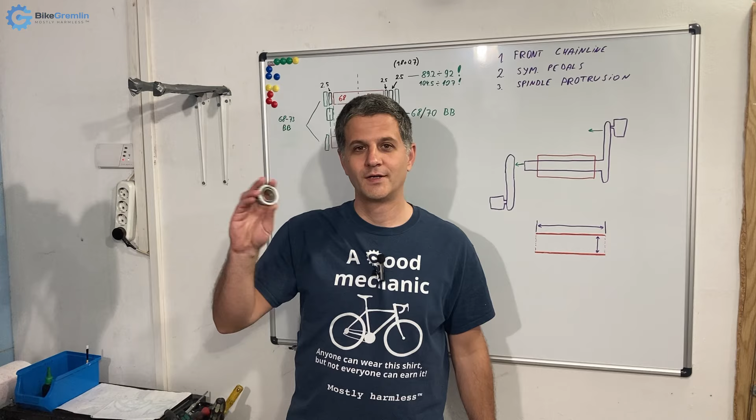Hi and welcome. Today I will be answering a question that many people ask and that confuses many people: when you're mounting these two-piece cranks where the spindle is part of the right hand side crank, and you just have the left hand side crank to attach to later.

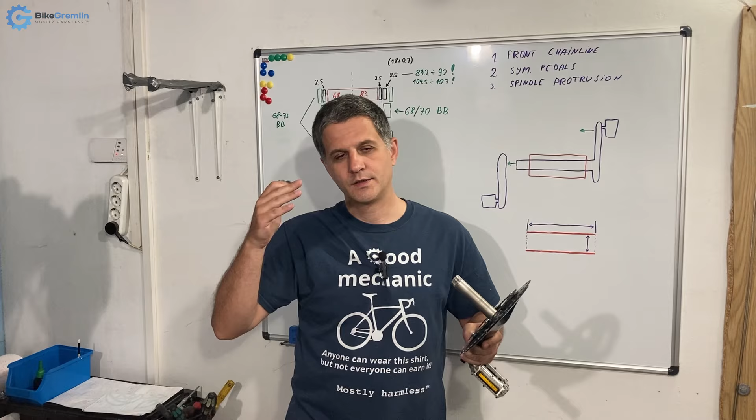For those systems, bearings and bottom bracket bearings and their cups usually have some spacers. So do you need to mount spacers? How many spacers? Do you need them on both sides, and why? That's what I will be answering today.

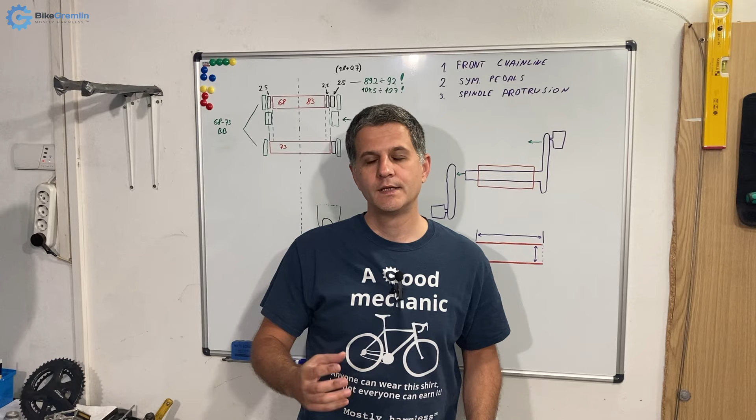Now some notes. I have three important notes to say here first. The first one is that I will mostly be dealing with Shimano threaded Hollowtech II bottom brackets and cups, but I will explain all the hows and whys so that you can apply that information to other models from different manufacturers, and for press fit and so on.

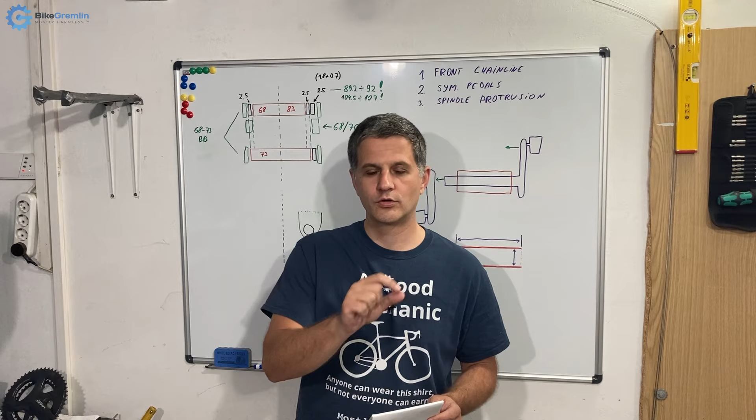The second thing is that when you Google your bottom bracket bearing model or crank model, you usually can find manufacturer specifications and instructions on whether you need spacers, how many, and on which side. So Google your model, add a space, and say user manual or dealer's manual or something like that. You can usually find that, and when you do it by the book, if everything on your bike is standard and more or less okay, you should be good.

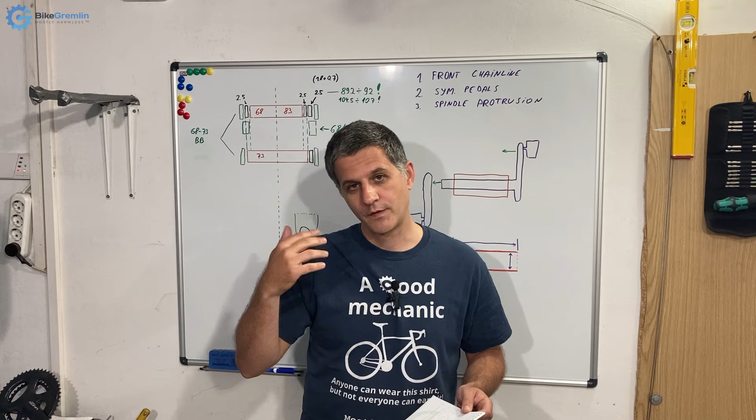That leads me to the third and final note, and that is that sometimes you deliberately want to make some improvisations, or you must because of how your bike is configured. So in this video I will try to explain all the hows and whys so that you can know what the problems are with improvisation and what to pay attention to. Okay, with that out of the way, let us move on.

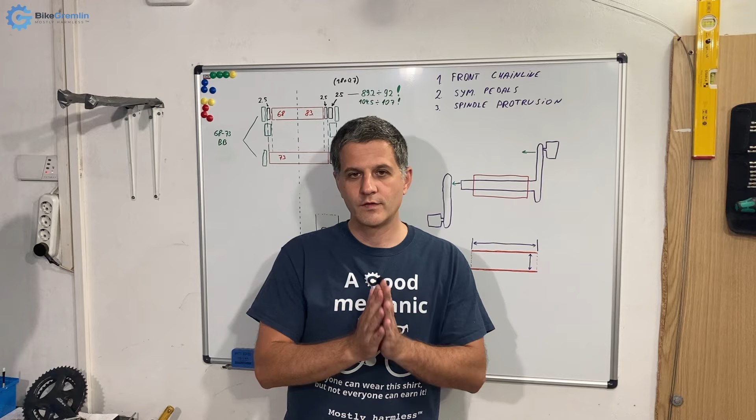The second big point is why we are doing that. When I'm doing something, I like to know why I'm doing it and to understand it. So we have three goals when we are dealing with those spacers and mounting our cranks. Our goals, I wrote them down here.

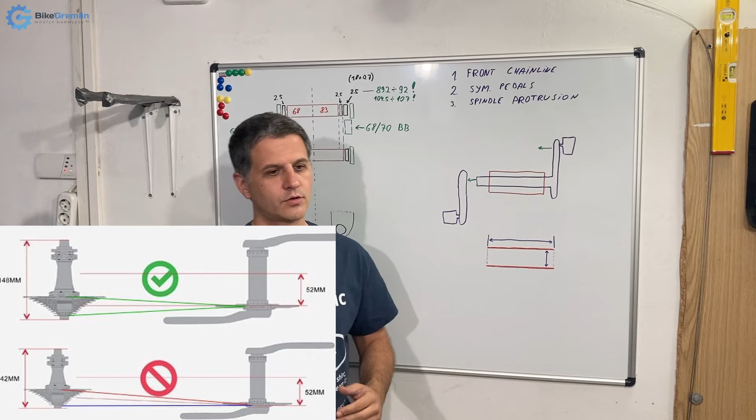The first one is the chain line, front chain line in particular. In this case, we want our front chainring or chainrings to be in line with the cassette. We don't want them to be far off, far out, or too close inwards, because then our chain will be running at an angle, and that causes poor shifting, your chain dropping when you back pedal, and more wear on components and many other problems.

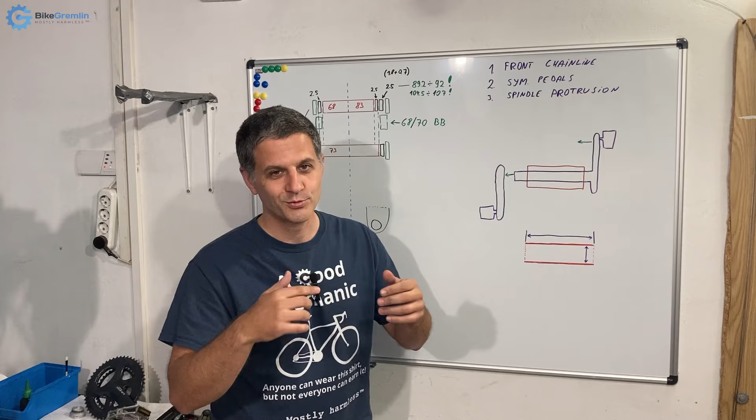For chainline, I have a separate video where I've explained that, and an article, and I will list those in this video's description. If I forget, use the comment section to remind me. So that's our first goal.

All three goals are what we are trying to achieve ideally at the same time when mounting our cranks and dealing with spacers. The second goal is to have our pedals symmetrical, meaning the right hand pedal and left hand pedal are approximately at the same distance from the frame's centerline, so that your legs are riding normally, not favoring one side or the other.

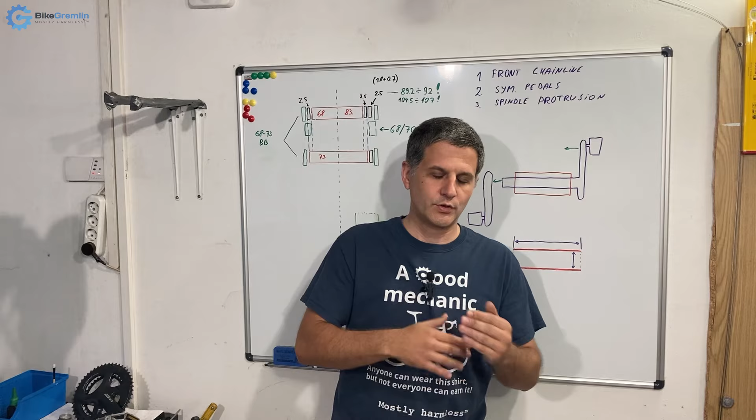So we don't want any drastic asymmetry when it comes to pedals. And third and final, we have to worry about the spindle protrusion.

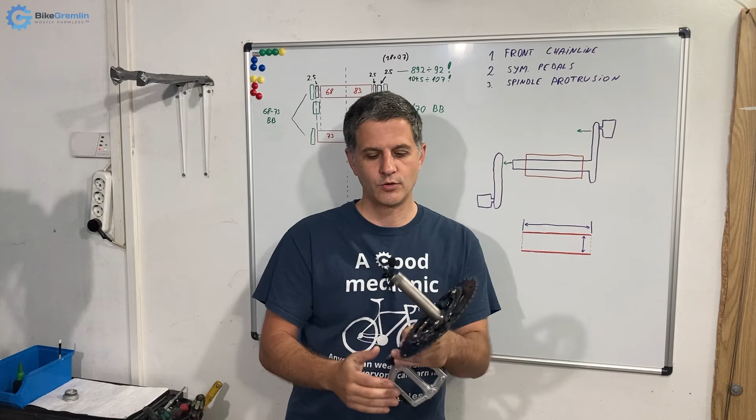What I mean by that: this is what a standard two-piece crank looks like, and we have a certain length of the spindle. So when we install this into our frame, if we have too many spacers on the right hand side, so it's too far out, then it will not stick out enough for us to mount the left hand side crank. It would look like this.

So anyway, that's one concern. Also, we don't want it to be too far out. This is what I tried to draw here.

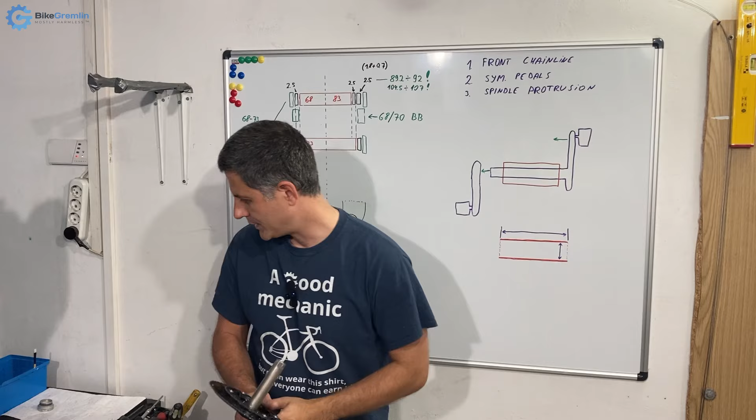If we move the right hand crank and spindle to the left, the other end moves to the left as well, as does the left spindle. That's because when you look at this system, we do have some wiggle room for the left hand spindle crank to move in or out, so we have some playroom, but it is not unlimited.

Here I can only push it this far. After that it will no longer go in. If we make this protrude too much out of the frame, then we would have some distance, some free play in our cranks when we mount them in the frame, and so they will be able to move and change your chain line as you're riding.

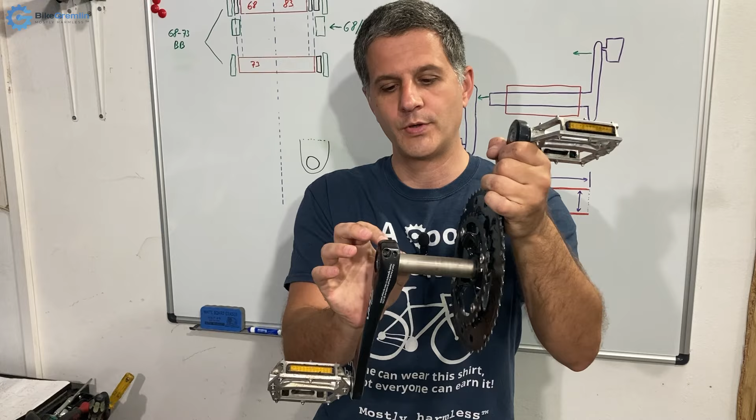It will not be held in securely, and also the bearing preload is adjusted by pushing the crank, at least with this model. With some it's on the other side, but you always have a certain amount of bottom bracket bearing preload that you can adjust, but it is not unlimited. So if the spindle is too long, if we don't put enough spacers all together, then we will have a problem adjusting enough preload on our bearings, and that will make them run inefficiently and create more drag and more wear.

So those are the three goals that we wish to achieve. Now a small digression, but a planned one. When it comes to choosing your bottom bracket bearings, I will briefly discuss how that is done. For those who just want to skip to the parts where I talk about spacers, you can use the table of contents or skip on the timeline. So if you're still here, let's discuss what I mean.

If you need to buy new bottom bracket bearings, it's a good idea to measure and double check. Sometimes owners and mechanics don't put the right parts in, so assuming everything is correct is sometimes wrong. It's not a bad idea to double check. When you need to see what kind of bearings your bicycle takes and how many spacers you need, there are two dimensions you need to measure.

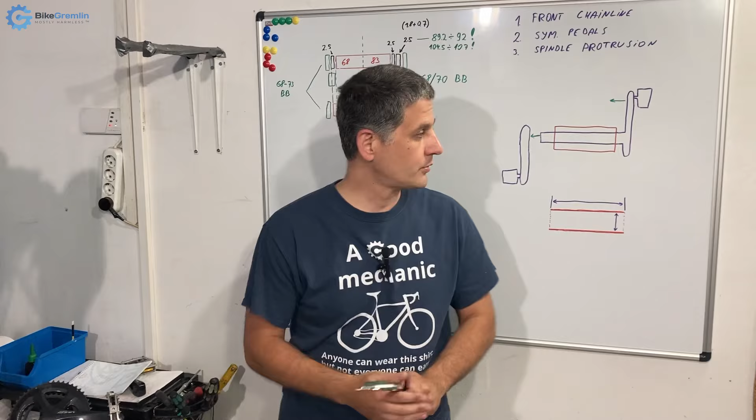The first one is the bottom bracket shell's width, which you can measure with calipers or a ruler. We will now move the camera to the bicycle to show how to measure that, but before that, just to note that we also need the shell for the bottom bracket on the frame, its inner diameter. So those are the two important dimensions: shell's width and inner diameter. Now we will move to the bicycle to show a few ways of how you can measure them.

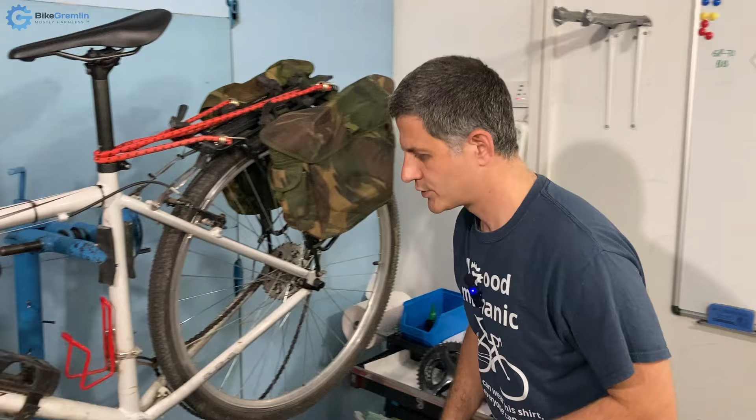So the way to measure the bottom bracket shell's width is to use, for me it's simplest, calipers, and just measure from one face to the other face. Here I have the right hand side cup already installed, so it's not as easy to align them, but that's for demonstrational purposes. I need to show something without taking too much time on the video, but this is the basic principle. You can also use a ruler to measure that.

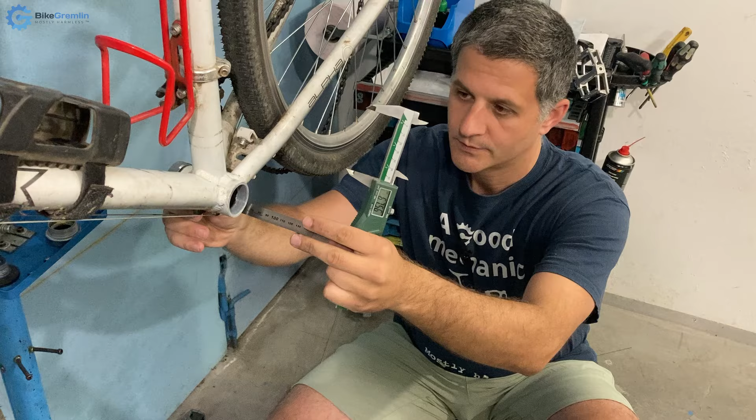It's more accurate when using calipers, but you can get it right pretty well with a ruler too. Here my frame has some cable guides on the bottom, which makes it more difficult to align the ruler properly. This is a 68mm wide bottom bracket, and using a ruler like this, it's not as easy to measure accurately. But that is how you measure the width.

As far as diameter goes, you can also use a ruler to try and get it in the center and measure the diameter, however that's not very precise for me. It's easier for me to use calipers. I also have a video explaining how to use calipers, so I'll try to put that in the video's description as well, but this is what I'm aiming for. Basically, this is the measurement I'm taking, and here I got 33.4 millimeters.

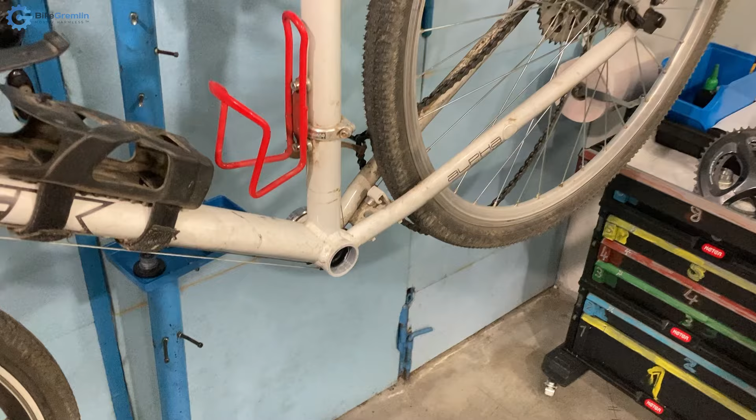Another problem when using this method is that you can move this a bit to one side or the other, and then you'll get a smaller diameter compared to getting it right at the middle. To avoid any imprecision or inaccuracy when measuring, I also have a video and article explaining the difference between accuracy and precision and how measurements are done. I'll try to put that one also in the video's description, so about 100 days worth of watching and reading.

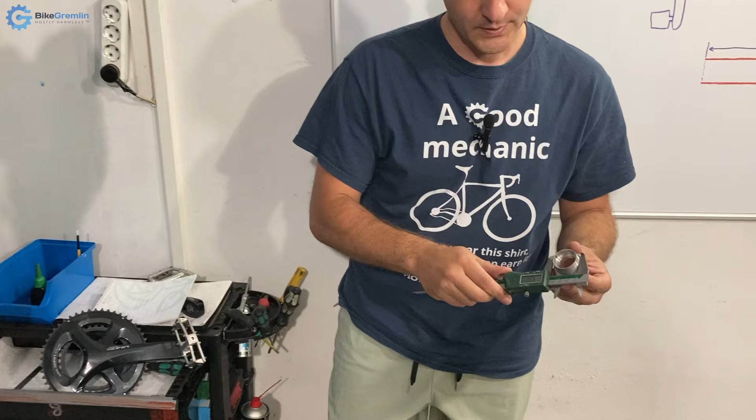But how to measure that more precisely: it's easier if you have some cups that are already nicely fitting in your frame, and it's more accurate to measure their outer diameter, especially with calipers, because then you know that you are aligned, these are parallel, so they are measuring what needs to be measured.

For press fit bottom brackets, this is all that it takes. However, for the threaded ones, there are a few catches, and I will briefly explain those.

As you can see, the threads are interlaced, so you have the cup that screws into the frame, and that is why the outer diameter of the cup is greater than the inner diameter of the shell when you measure it. Otherwise you would be able to just press it in. So when you measure the outer diameter, you get a greater distance compared to measuring the inner diameter of the bottom bracket shell.

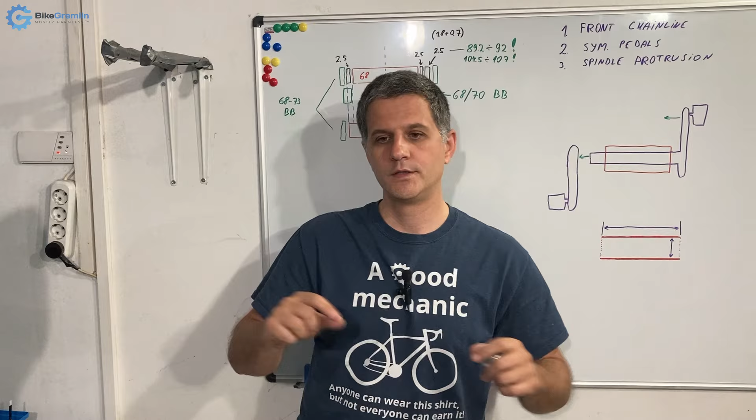On my website there is an article showing and listing all the diameters, both inner for the shell and outer for the cups, for all the threaded bottom bracket standards. I'll put that in the video description. I also have an article explaining and listing all the diameters for the press fit bottom brackets. That too will be available in the video description. I use that as a resource because there's no way for me to remember everything - there are so many different variations.

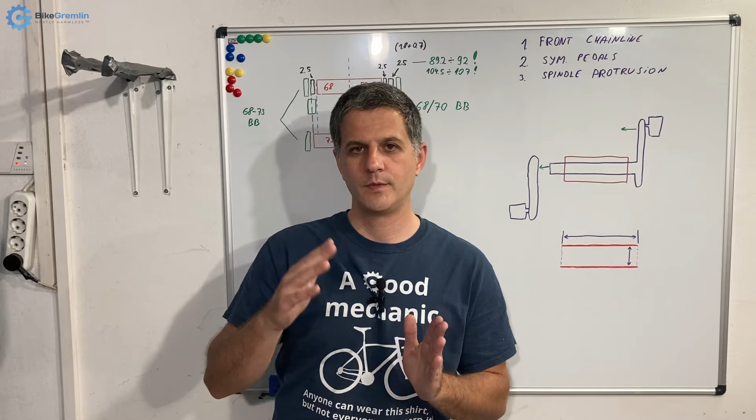But let me stay a bit longer on the threaded bottom brackets. Generally, most bicycles made in this century will have a bottom bracket threaded to the British standard, or English, however people call it. However, a newer, later standard is called T47, and with T47 you will get about 47 millimeters diameter. So if you have a huge diameter, it's most probably, as far as I know at the moment of recording, T47 - that's the only larger threaded standard.

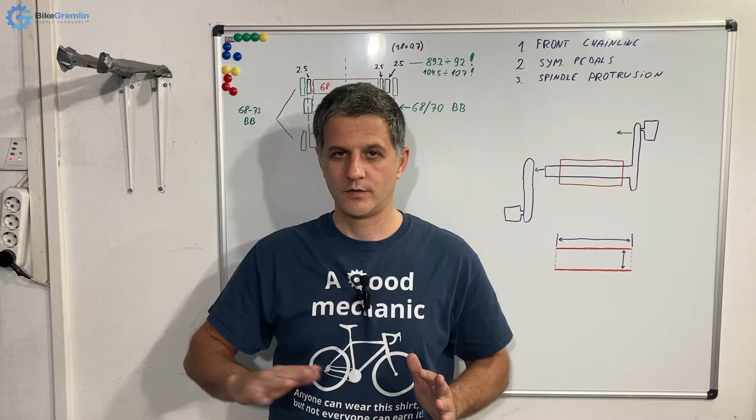However, for the smaller diameters, if you are at about 34-35 millimeters, then it gets a little trickier. There are several now decades-obsolete standards that you are highly unlikely to come across, but in addition to the British standard, there is another one more likely to be encountered on some Italian road bicycle frames, for example - the Italian standard. It's very similar in diameter to the British, and again British is the most common, so if it's not a huge hole, it's most probably British, but it could be Italian, so it's best to measure.

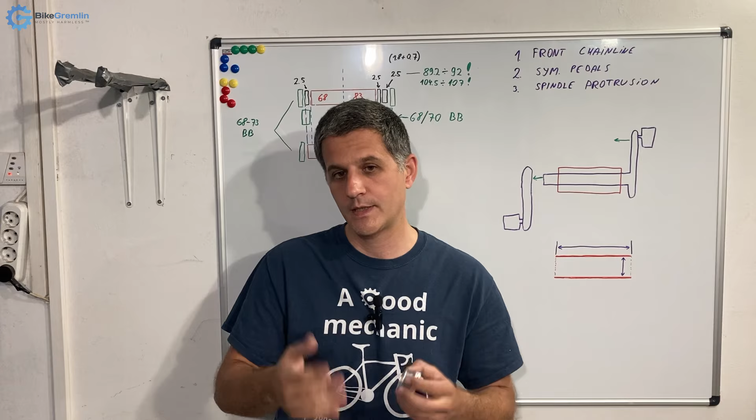How to measure it and how to tell the difference: unscrew and remove the left hand side cup if you have cups already installed. Don't touch the right hand side one, just the left hand cup, and measure its outer diameter. If you get a result below 35 millimeters, then it's British standard. If you get a result over 35 millimeters, then it's Italian. Here is an Italian cup and cone system of bottom bracket, but you can see the diameter is over 35 millimeters.

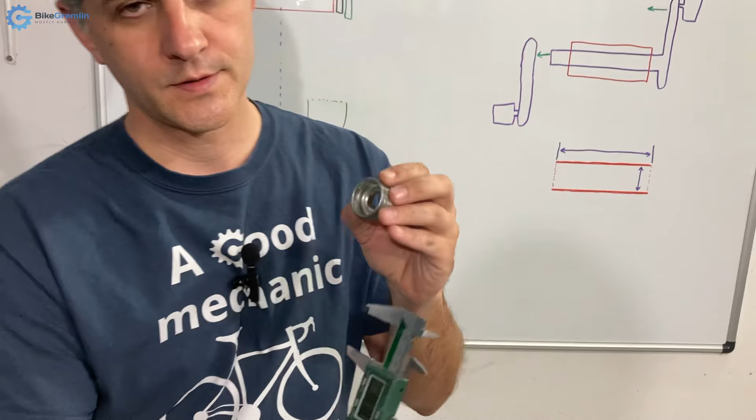If you're measuring the bottom bracket shell on the frame, if you don't have cups, then you can get smaller dimensions that are listed on my website, but roughly the British will be about 34 and the Italian will be about 35, but maybe not over them. So for those details, look at the website, but that's the basic difference. And why is that important?

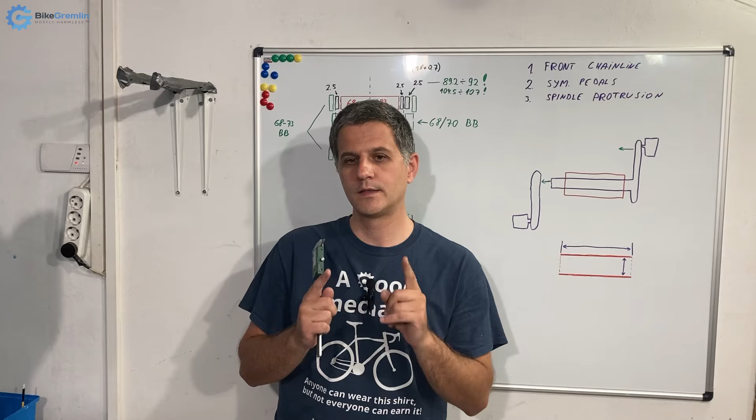Another way to tell if your frame is Italian is that the bottom bracket shell will be 70 millimeters wide. All the other standards, the British and the T47, don't use that width. So if it's 70 millimeters, that's another sign it might be Italian, but it's best to double check both the width and the diameter to avoid a measurement mistake causing problems.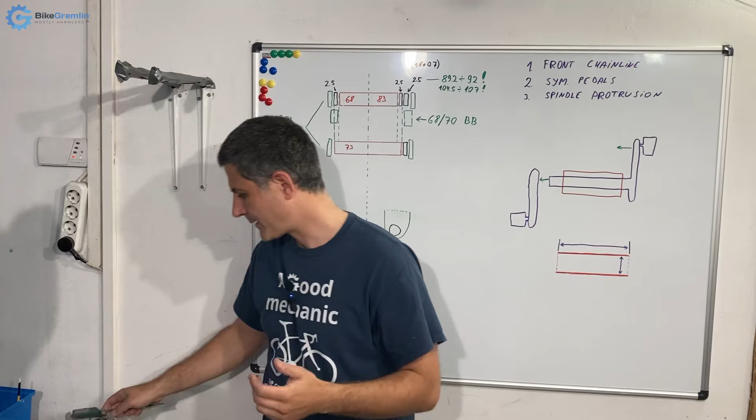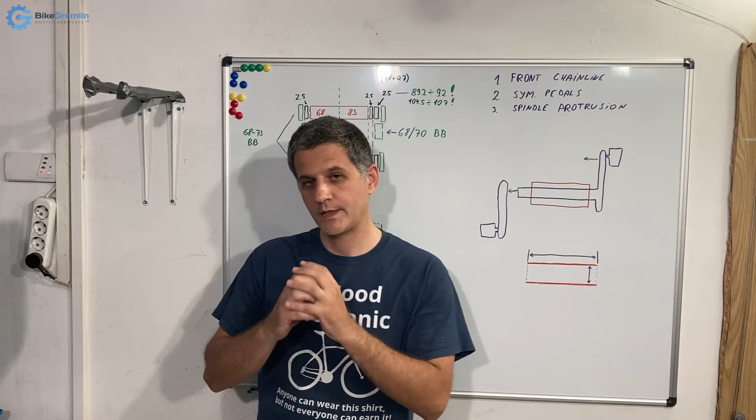How can it cause problems? Well, with the Italian bottom bracket standard, both cups are unscrewed counterclockwise, so it's a normal thread, which is a bad design, by the way. But for British and T47, the right hand side cup is unscrewed clockwise - you unscrew it in the direction you would normally screw a bottom bracket cup or screw in. So it's the opposite for the right hand side cup, and many people make the mistake of trying to unscrew the right hand side cup counterclockwise, as they would normally do with all other bolts and nuts, and then they end up tightening it or damaging threads and causing all sorts of headaches.

So that's why I took so much time to explain this. It's touched upon in many of my other videos and articles, but I think it's worth it, and you can always rewind. So now finally, if I didn't forget anything, we can now go to the spacers.

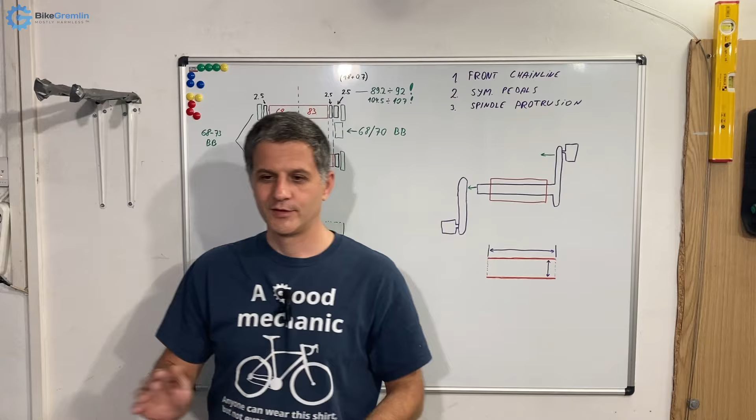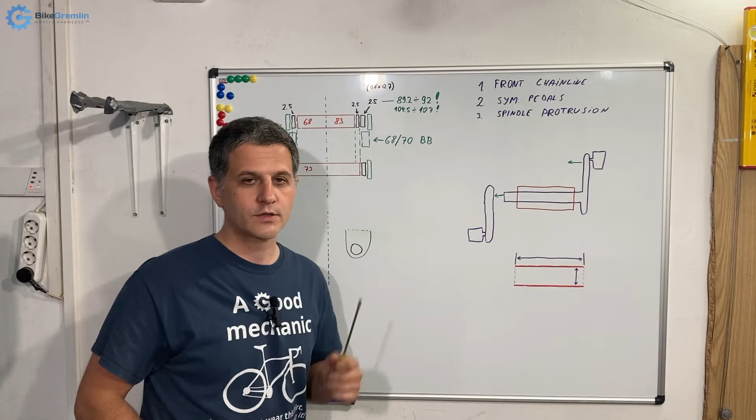Okay, so the action starts now. For spacers, many Shimano threaded bottom brackets require you to place one spacer of 2.5 millimeters thickness on the right hand side. So regardless of the other combinations, there's always one spacer on the right hand side of 2.5 millimeters thickness.

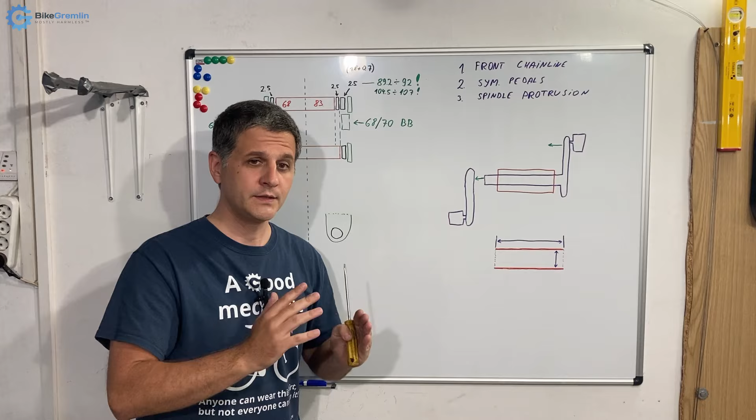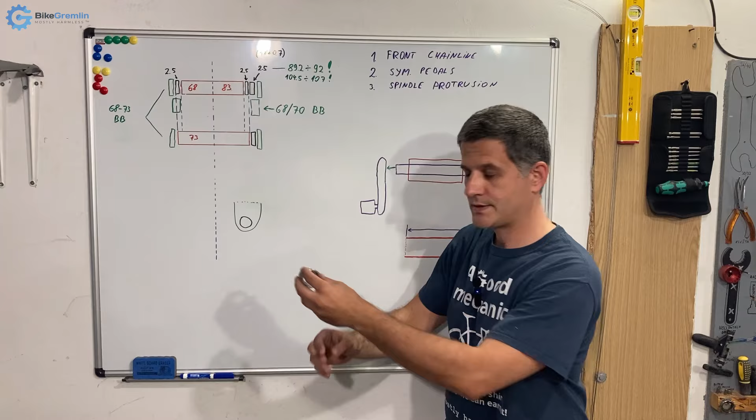Often when you buy bottom bracket cups, you will get them with a combination of two spacers, 1.8 and 0.7 millimeter thickness. Why did they do that? Well, that brings us to our goals for front chain line. They wanted to allow you to have the chain rings and pedal symmetry right, as it should be. But if you need to add a front derailleur that is held in place by the bottom bracket cup, as I try to draw here, you put the bottom bracket through it and tighten it, and that also holds your front derailleur mounting, or a chain guard or similar, in place.

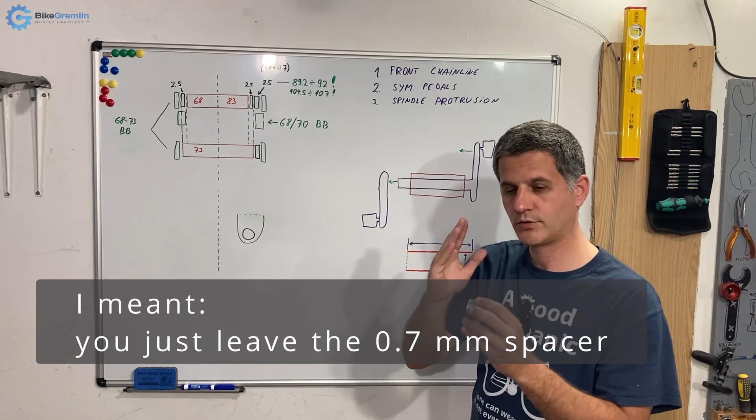Since they already designed 2.5 millimeters of extra room, you always have a spacer. If you're using one of these mounts, depending on how thick they are, you can remove all the 2.5 millimeters and just put that thingy, or remove one of these spacers. If it's 1.8 millimeters or so thick, you just leave the 0.7 millimeter spacer of the two thin ones you get, so you can get your chain line and pedals correct while still being able to mount chain guards and similar stuff. That is why they designed most, but not all, of their cups, and as far as I know all the threaded ones, with the 2.5 millimeter spacer. So that is a given.

Now let's talk about the other systems and the other widths and spacers. But first let me show you spacers, just one second.

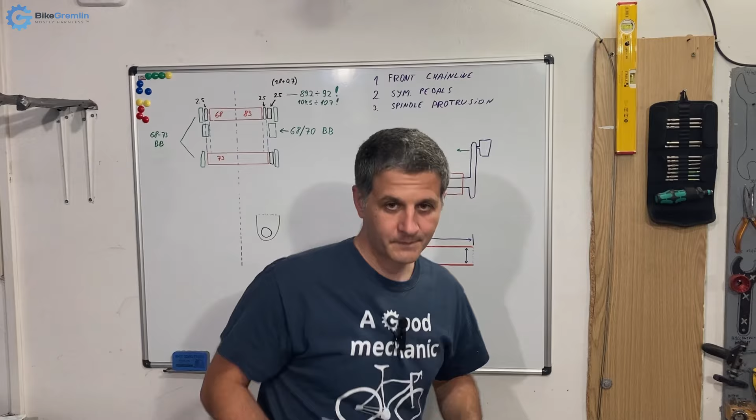Okay, sorry for the interruption, I forgot to have these at hand. So this is a 1.8 millimeter spacer next to a 2.5 millimeter spacer. I don't have a 0.7 millimeter spacer with me right now, but when I align the 0.7 with the 1.8, I get the same thickness as the 2.5 millimeter spacer. So those are the options you have.

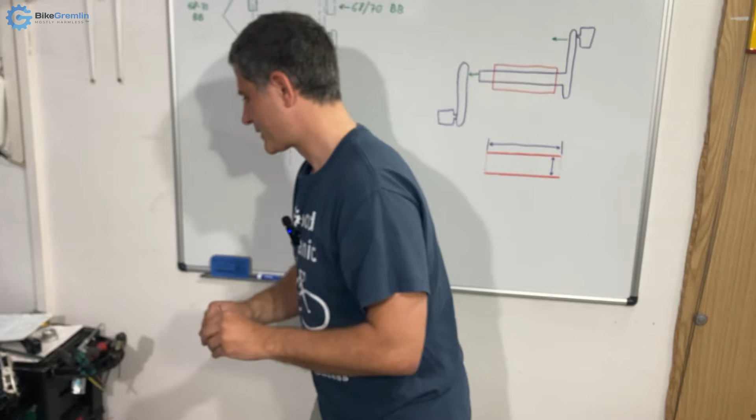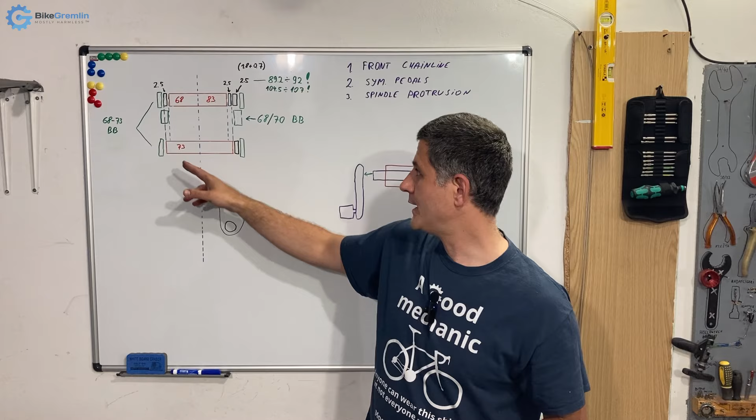Now let's move on. When it comes to bottom brackets, let's start with road bicycles. If you have a crank for a road bicycle, like a 105, Ultegra, Sora, or similar, they are designed for the 68 millimeter bottom bracket shell on the frame. They will not fit the wider ones very well, though there are models for the 83 millimeter wide shells, so when buying, double check depending on your frame. You should know what kind of bottom bracket shell your frame and cranks fit, and when buying new cranks, double check if they fit there.

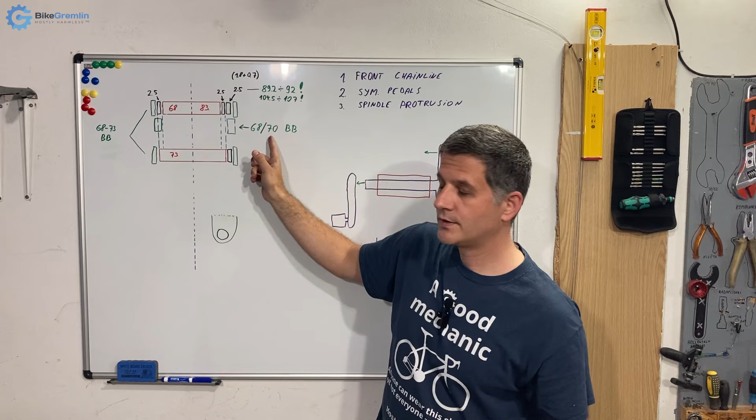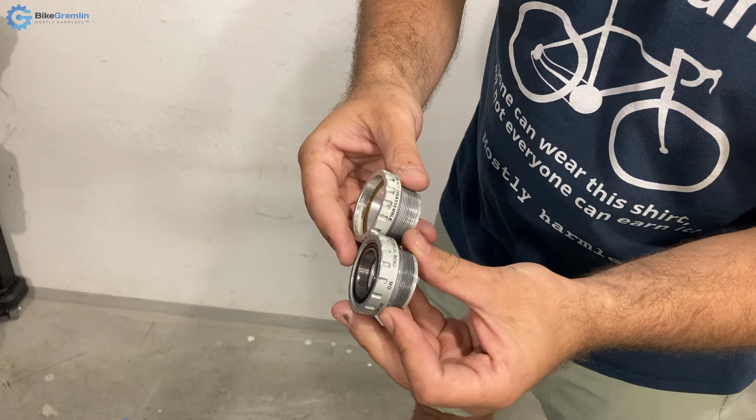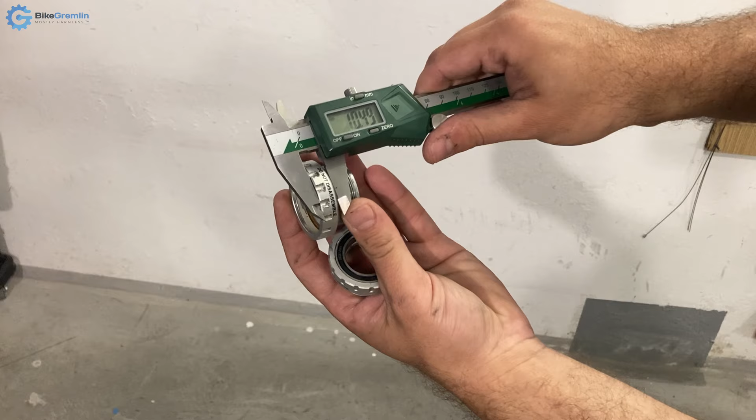What is the catch? Here I will try to show it. This is the right hand side cup for the mountain bike bottom bracket and for the road bike, and you can see the road bike bottom bracket is a bit thicker here. I will try to measure them for comparison. So here we have 11.4, 11.5, something like that, for the road bike, and for the MTB we have 10.49. So the road bicycle bottom bracket cups have this part a bit thicker, but not by 2.5 millimeters, just by 1 millimeter. So on both sides you get about 1 millimeter more compared to using the mountain bike cups.

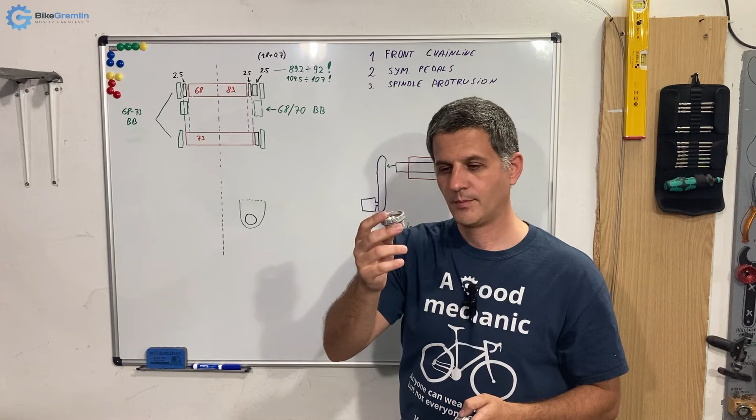So you don't need 2.5 millimeter spacers, install those two cups and you're good. If you decide to use mountain bike bottom bracket cups, you might end up with, if you use only one 2.5 millimeter spacer... I'll get to that, sorry, just a second.

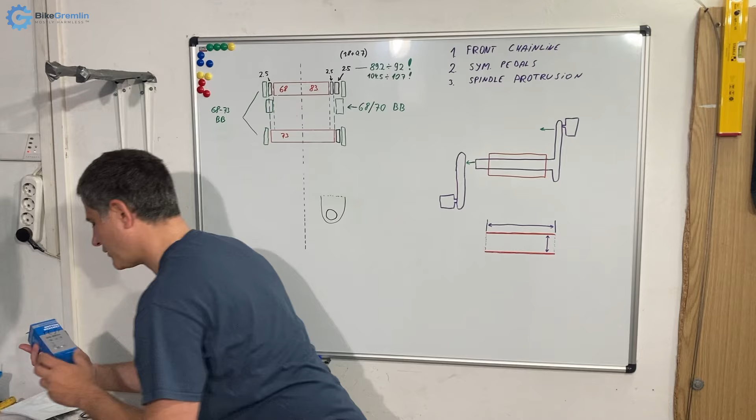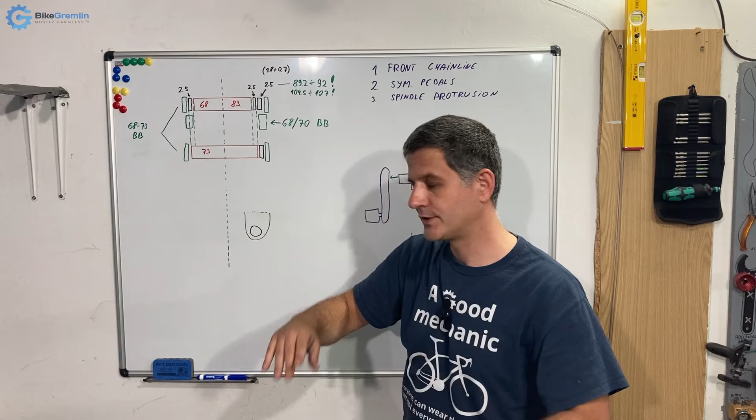Now let's talk about mountain bicycle bottom bracket cups. As you can see, the right hand cup has longer threads, a bit more thread here, and that has a good reason. Shimano usually sells their mountain bike bottom bracket cups to fit both 68 and 73 millimeter wide shells, and also makes them for 83 millimeter wide as a different model. How do they achieve that? Well, you saw they made longer threads, so their design is you always go with the 2.5 millimeter default spacer, as I explained earlier. But if your frame is 68 millimeters wide, you also need to add an extra 2.5 millimeter spacer on the right and 2.5 millimeter on the left, so you get effectively 5 millimeters more.

On the other hand, if your frame is 73 millimeters wide, then you don't use the two extra spacers, just the default one for the right hand side. Because the frame is wider by 5 millimeters, 73 compared to 68, you remove those two spacers, and then you have the bottom bracket cups at the same distance from each other compared to fitting them on a 68 millimeter frame with two extra spacers. That is the idea for the chain line and pedal symmetry.

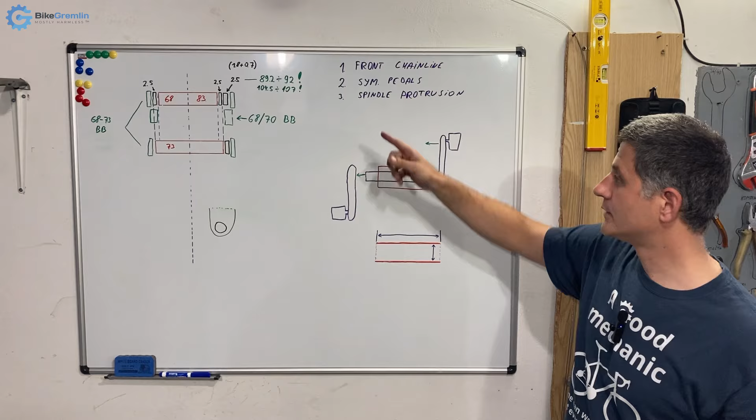This leads us to one catch: if you have a road bicycle crank and you're trying to use bottom brackets for mountain bikes, they are designed to be a little bit wider because mountain bikes use a wider chain line, so they want the front line to align with the wider rear chain line.

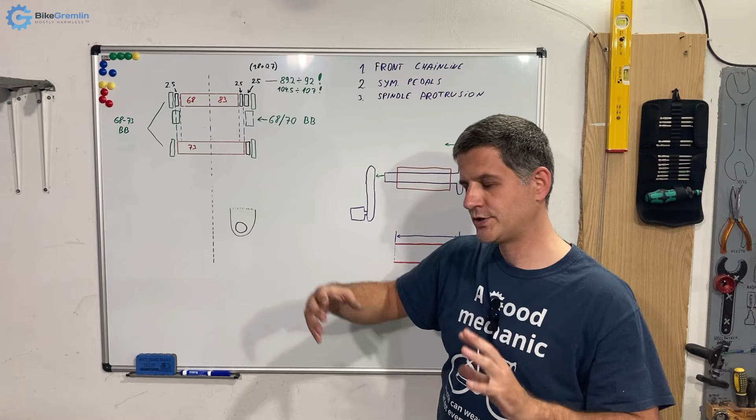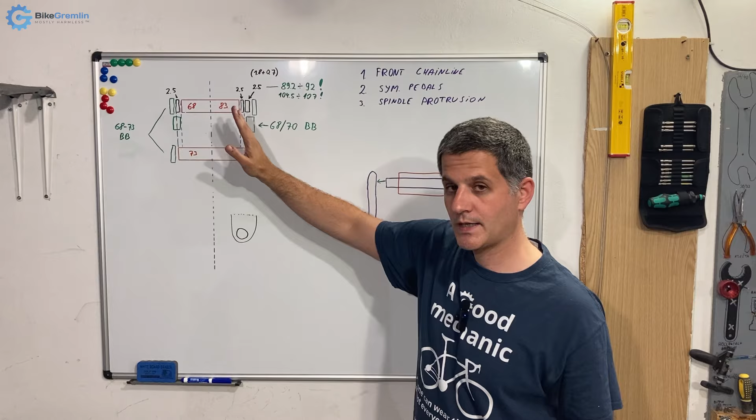In that case you might end up with your axle not protruding enough to mount the pedal, which could be a problem. You can play with that by making custom spacers so you don't have 5 millimeters more on a 68 millimeter bottom bracket, but make it a bit smaller. You need about half a millimeter or 1 millimeter of spacers on each side, not 2.5, to get the bottom bracket cup ends at the same distance. That's another thing to pay attention to, to make sure you did everything right.

Shimano have this little thingy that is mounted on the left hand side crank. You mount it from the inner side and use a bolt to put it through, so it's held in place. Then when you slide your crank onto the spindle, you should be able to press this to get in place and get aligned all the way. It has a small protrusion that should fit in.

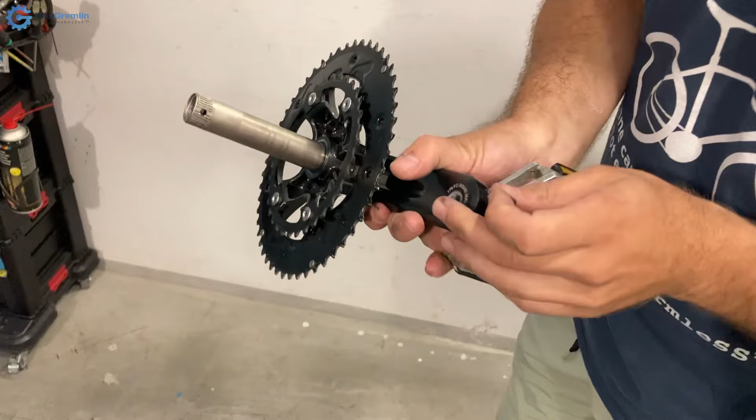Let me show you. This is where it goes in, this is the hole, so when you mount your left hand crank and tilt it, it should come in here. In case it cannot engage, it's either too far out or too close in, meaning your spindle length is not appropriate, or that you did not put enough spacers. If you put too many spacers, you will get it too far out, which tells you that your left hand side crank will not have enough real estate to be held on tightly.

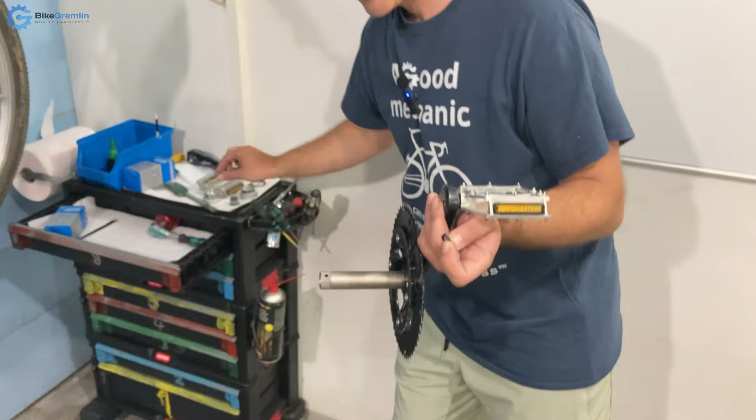So this is more like helping you make sure everything is aligned, it doesn't hold any strength. Likewise, if it cannot engage on this side, if it hits here, that means your left crank is too far in, and it usually won't go that far because this widens. But if you manage, you'll know you've put it too far, and you'll have this protruding outside, unable to use the bolt at the end of the spindle to push the crank and create bearing preload. So in that case your spindle is protruding too far out.

That's what this is used for, and it's a neat system, about 5 millimeters wide. If I compare putting it to the middle, we have about 2.5 millimeters of room to miss on the outside or inside, so there's some adjustment left. But if this fits and you mount it, you can unscrew the bolt and throw it away. It's not needed to hold the cranks in place, it's just used to keep everything aligned and help you assure you did everything properly.

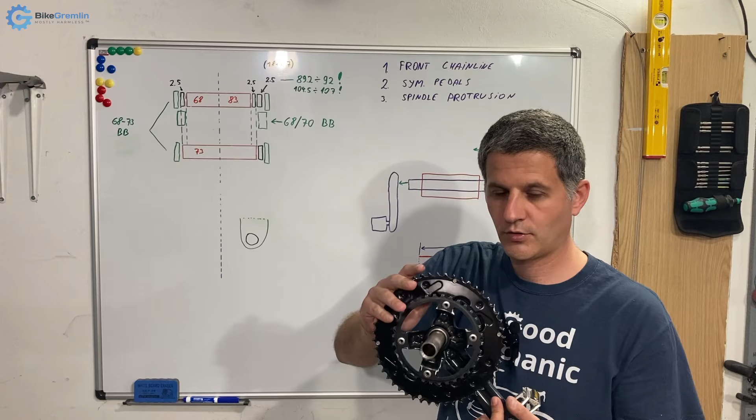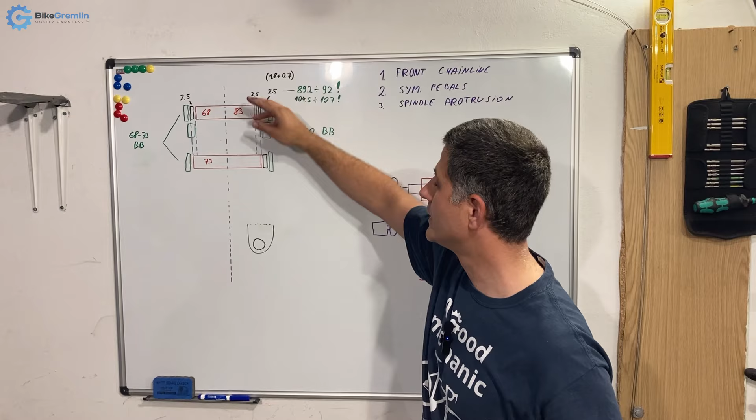So if you are playing with the chain line, as I tried to explain using bottom bracket cups for mountain bike cranks with a road bicycle crank like this one, you'll notice that your spacers, even by the book, will be too wide and you won't be able to engage that little thingy. So you'd have to figure it out, and usually it helps with a 1 millimeter spacer on each side. Or you could put 2.5 millimeters on both sides and remove just one, moving your cranks a bit to the left. It's not a huge deal, but depends on your rear chain line and what you're trying to achieve. We'll watch that video about chain line, so I won't go into those details here.

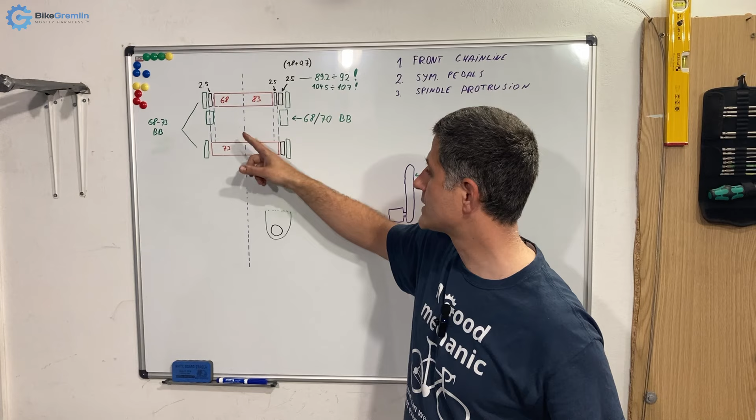And that's one thing. When dealing with 83 millimeter bottom brackets, for some reason Shimano designed those cups so they have to be used with the default right hand side spacer of 2.5 millimeters, plus an extra 2, just like when using 68 millimeter frame with mountain bike bottom bracket cups. So they left some more adjustment there for some reason. I don't have the answer to why, but it usually boils down to playing with the chain line, getting it right, and offering some room to wiggle.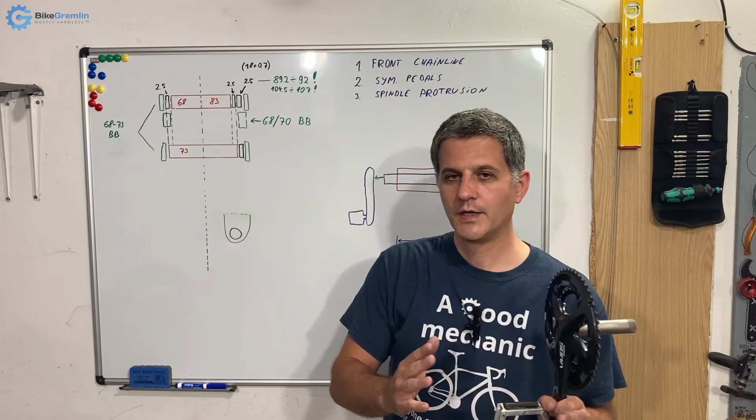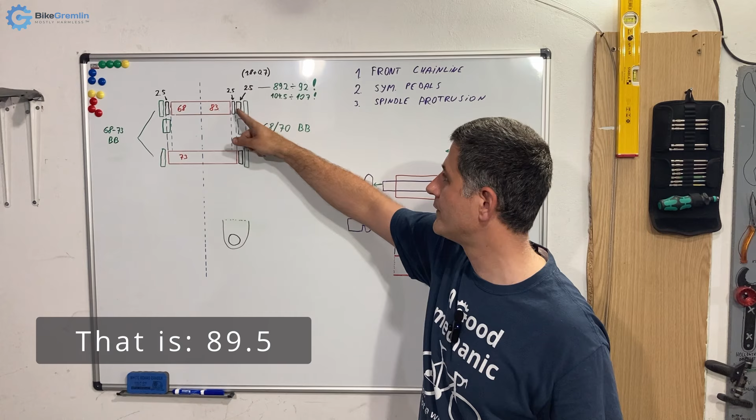For press fit bottom brackets, you usually don't need any extra spacers. They don't come with the default 2.5 millimeter spacer for the right hand side crank usually, but if you have bottom bracket cups designed for 89.5 millimeter to 92 millimeter frames, then if your frame is 89.5, you add one 2.5 millimeter spacer just on the right hand side cup. If your frame is 92 millimeters, you add no spacers. That means on an 89.5 millimeter frame, your crank will be a bit further to the right, and your pedal might end up further right compared to the left pedal. But it's not a huge deal - 2.5 millimeters is acceptable, and you most likely will not notice that when riding.

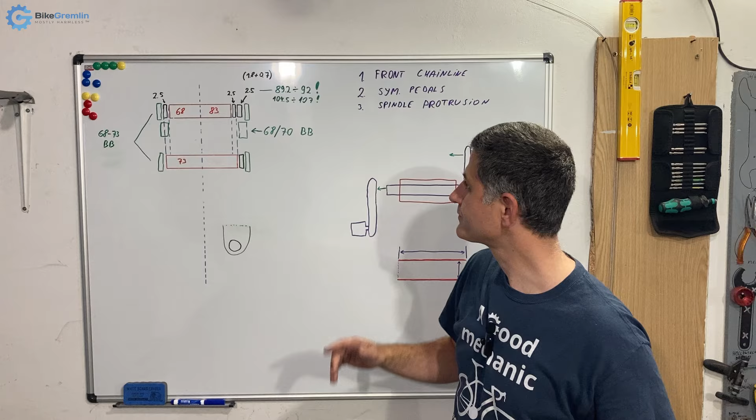Similar goes for cups designed to work with both 104.5 millimeter frames and 107 millimeter frames. There we also have a 2.5 millimeter difference, and if your frame is the narrower one, you add the 2.5 millimeter spacer on the right hand side cup before you press it in.

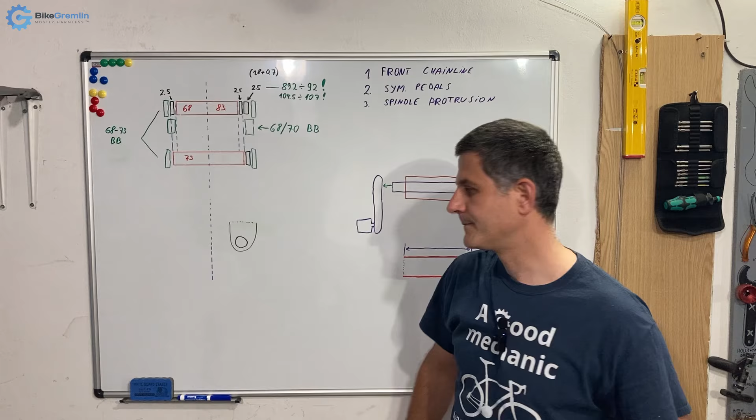So I will just briefly show the principle - this is what it boils down to. You put the spacer on before you screw it in. Put anti-seize paste on both the threads and the spacer face, or some grease, to make sure it all works smoothly - but that's the basic principle. Let me see if I forgot something to mention - I think I covered it all.

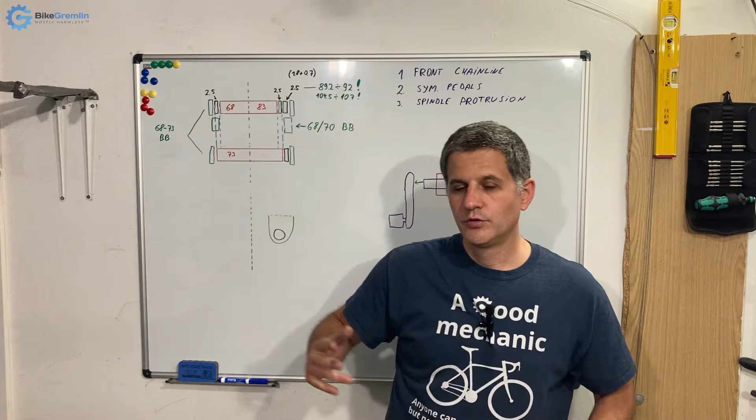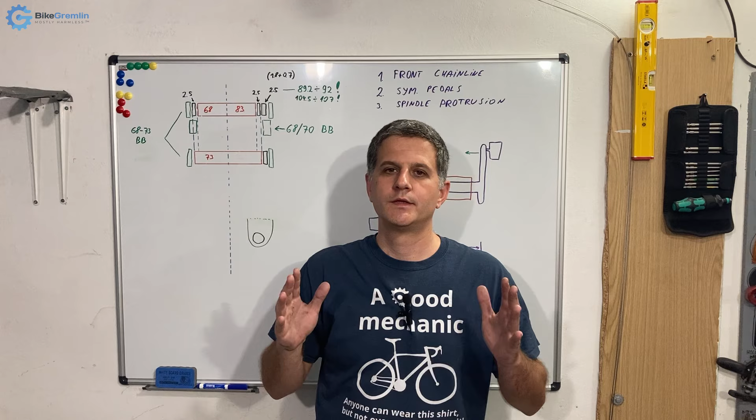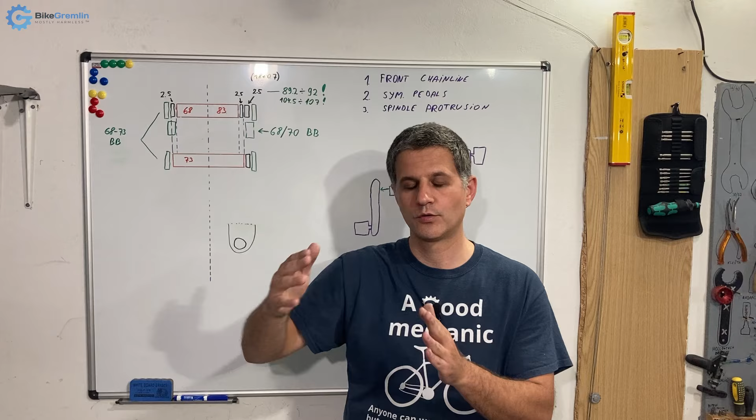In my video about installing Hollowtech II bottom brackets, we played a bit with the chain line - if you watch that video you'll see we put more spacers on the left hand side and fewer on the right hand side, if memory serves me correctly. That's a deliberate mismatch, and on that particular frame the cranks are moved a bit towards the left, but the chain line works well for what the bicycle's user uses the bike for, and that gets the job done. If you have a front derailleur, that's another thing to pay attention to when deliberately playing with the chain line, because you must make sure you don't move your cranks too far out or too close in, so your front derailleur can still shift to the largest, most outward, or to the smallest chainring.

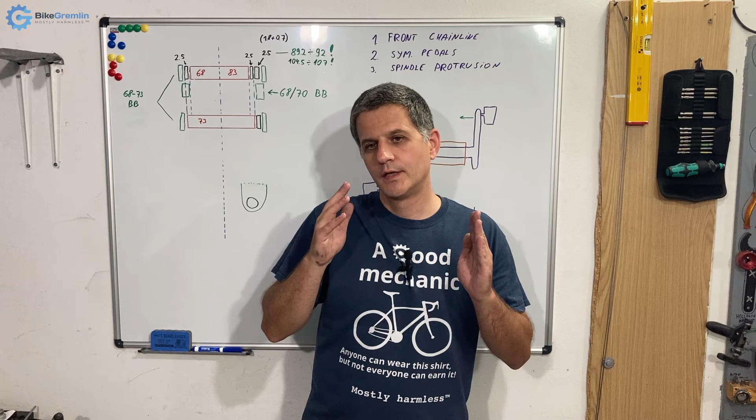So double check that as well, along with all the other things like spindle protrusion, getting your chain line right, and getting your pedals aligned. And I think this is the whole video - I don't think I forgot to say anything. If you have any comments, questions, corrections or additions, use the comment section below. I hope this helps you. I tried to explain the basics, what you need to check and what you're looking for, and for most situations, as I said in the beginning, doing it by the book as the manufacturer says for your model of cranks and bottom brackets, you'll be good.

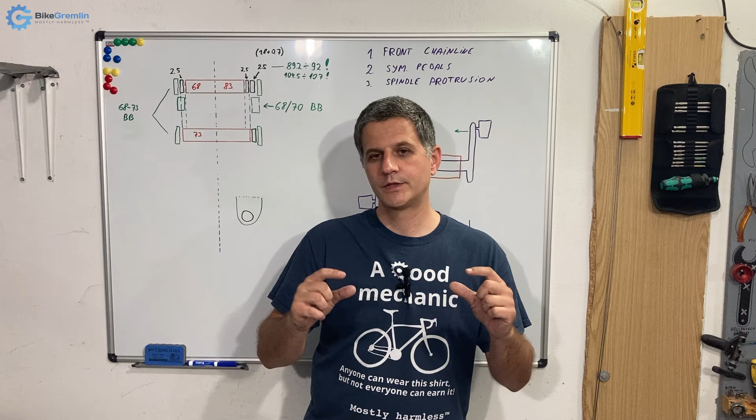Also make sure when buying cranks and bottom bracket bearings to check your frame's bottom bracket shell, both width and diameter, because you can get mismatches if you buy cranks too long for boost hubs and frames - you might not be able to fit them properly on a narrower frame. The threads of the cups, even though MTB cups have a bit more thread on the right hand side, are not unlimited. So if you put too many spacers, you might end up with not enough thread engagement - that's another thing to pay attention to.

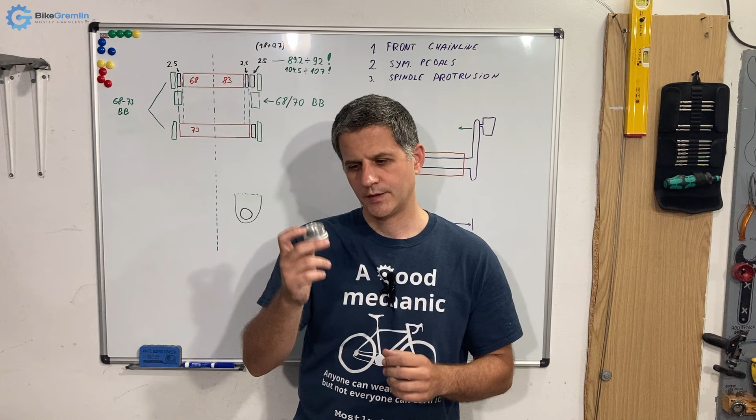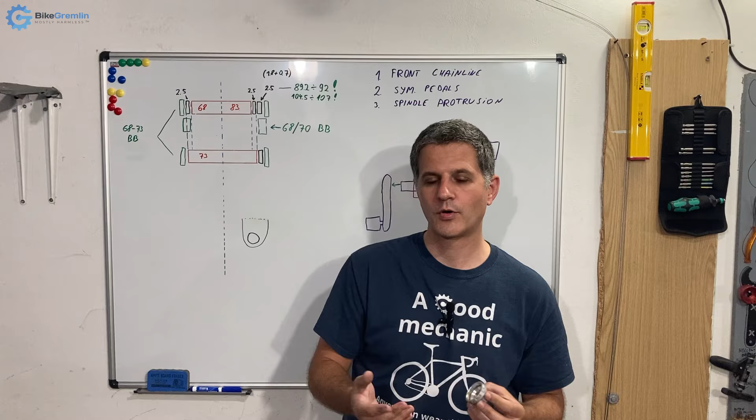I think now I covered everything. Thank you very much for watching, and of course don't forget to like, share, subscribe.